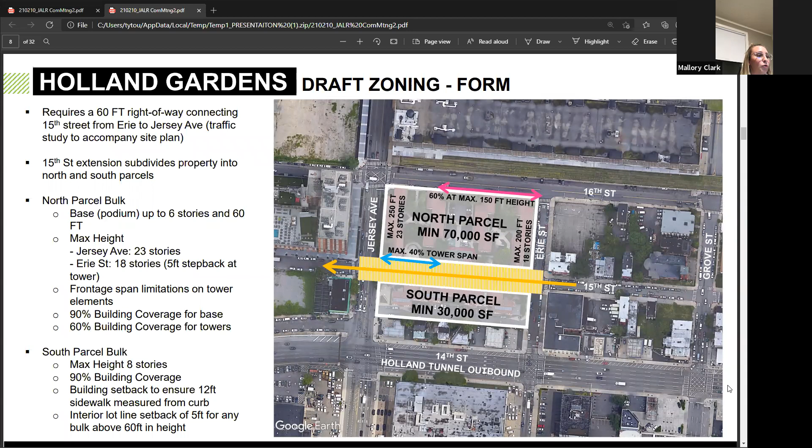This portion, in the current scenario that the Jersey City Housing Authority has pursued, is envisioned right now as for-sale affordable condominium. So that'll be a unique home ownership opportunity at the affordable level, which is not as common an affordable housing prototype as we see here in the city. This will be a lower rise element up to 8 stories, and it's still to be determined if it plays out to actually be for sale, but that is the scenario they're currently exploring.

And then what does this mean in terms of function? We've gone over the form and how tall things might be, but there's a lot of other sides of this property that the community is concerned about. So there are things we're writing into the plan. Some of these are handled and enforced by the Jersey City Housing Authority, but there's the ability to address some of these things in the zoning itself, and that's where we step in.

So per the development of this property and the bonus to develop it in this way, there will be a minimum of 1-to-1 replacement of existing public housing or income-restricted units on the northern parcel, comprising no less than 20% of total units in the total development. So the northern and southern parcel combined, the 1-to-1 replacement must be at least 20% of that total.

What that really does is, although this property is currently 100% affordable housing, market rate will be introduced on top of the existing affordable housing units in the future, and this makes sure that future development also aligns to the IZO with the 20% requirement.

This also allows us to permit adjustment of the income-restricted unit mix, meaning if there's 5 four-bedrooms, 3 two-bedrooms, and 1 three-bedroom, the new version of this property doesn't have to identically recreate that mix, but it does have to match the total bedrooms.

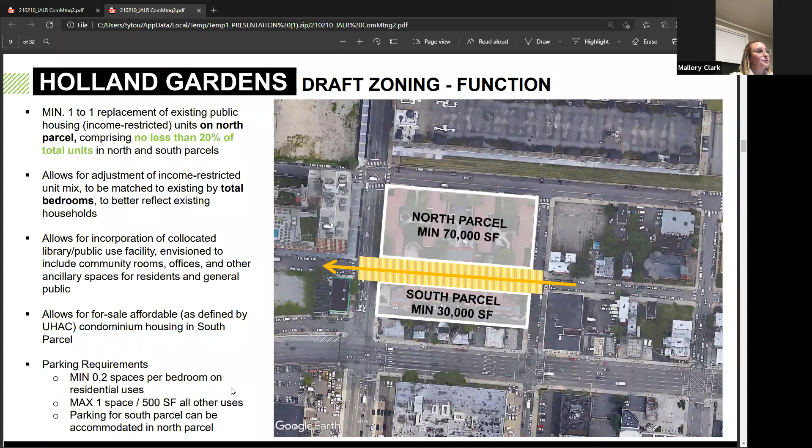Moving on to the other site we discussed last time, where we've developed the light rail bonus a little further and what that means from a form standpoint as well.

So that sets back and allows again for access to hopefully a future light rail station from the Jersey Ave sidewalk. And then we have a 5-foot setback from lots 8 and 10, which are the gas station that exists on that block, and then that grass area. It's 2 lots there, and so there's a 5-foot setback required.

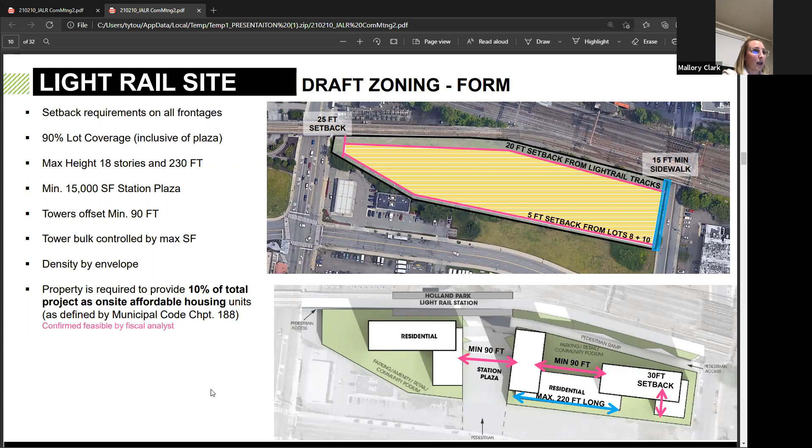I think that basically sums up where we're at with the language. Just to clarify, we will be sharing the draft language, so the actual redevelopment plan that we're looking to move forward, and we're studying a little further. We will be sharing that document on the data portal as well, so you'll be able to see all these details. We just wanted to go over the high level and give you a visual sense of what that language means.

So that's language specific in the redevelopment plan to some of these site specific bonuses. And now we'll get into just this general bonus language.

But first, I just want to quickly end the poll. Thank you for participating, and I can just quickly show you all the results. Is that visible? Yes, okay wonderful. All right, oh okay, other. We got more others for how did you hear about this meeting? Okay, so I am curious as to how you're hearing about it. Maybe if you could throw in the Q&A where else you were getting that information, that might be helpful. I don't want to spend too much time on it in terms of conversation, just because we want to hear some other information from you.

And then I think it's kind of a similar breakdown to last time in terms of where people, why people were interested in this area. So we've got about 17% of you who live in this area, and then 21% who live in an adjacent area.

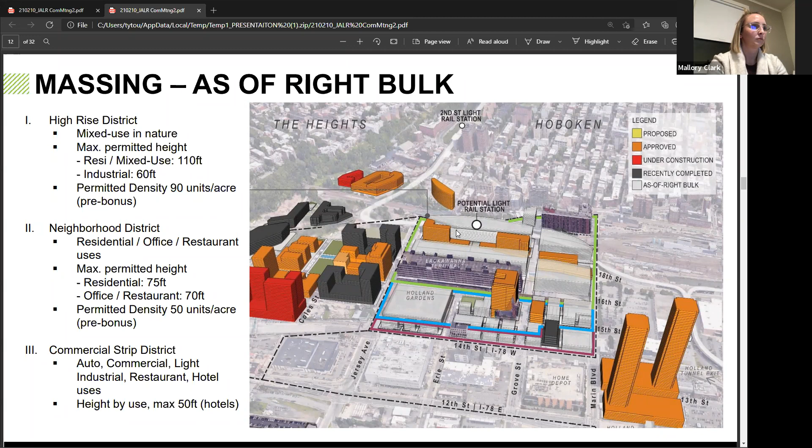So from there, one thing that we talked about at the last meeting was adjusting the open space bonus that currently is written into the plan. So currently we're looking to modify the contribution amount of the existing bonus. There's currently an existing bonus within the plan that would give an additional 30 dwelling units per acre, so taking it from 50 to 80 dwelling units per acre, or 90 to 120. So this additional density would fit into the permitted bulk. So there would be no reason for additional height as a result of this bonus.

But basically we're looking to pick up and modify the contribution amount, which was currently set at $5,500 per unit, which at the last meeting we expressed as a very low number. And then we're looking now to match that contribution to the IZO payment in lieu contribution. So for this area, that's $75,000. So what used to be a contribution of $5,500, we are proposing a $75,000 contribution.

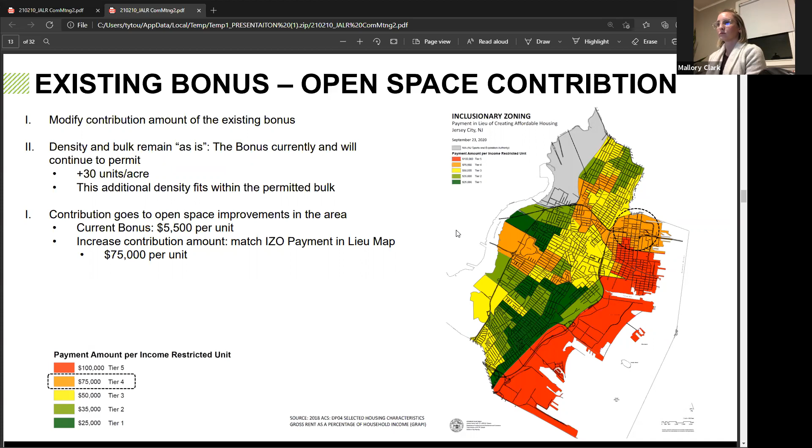And then within this rewrite effort, we're incorporating an affordable housing bonus. The affordable housing bonus would not apply to the commercial strip district, as we'd keep those uses as they are. We feel that they make sense in their geography, and their proximity to 14th Street.

So this bonus would apply basically everywhere else in the plan area where there isn't existing Holland Gardens, which has particular language we talked about, and the light rail site that has particular language and zoning we talked about. So pretty much everywhere else in the plan area, this could be utilized.

So the bonus would require 20% affordable on site. The density is not regulated by dwelling units per acre or FAR. Similarly, as we described for the light rail site, it's regulated by a building envelope. So we've set area, yard, and bulk regulations.

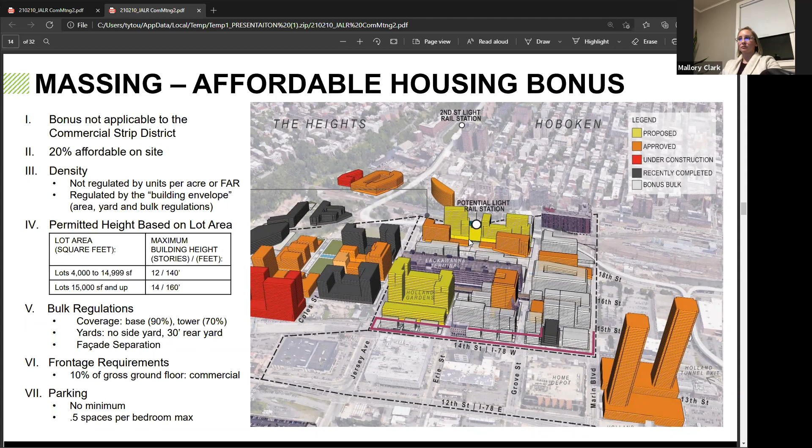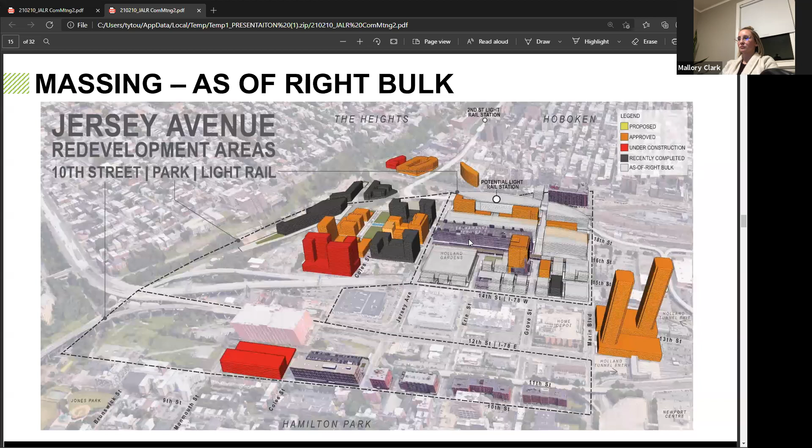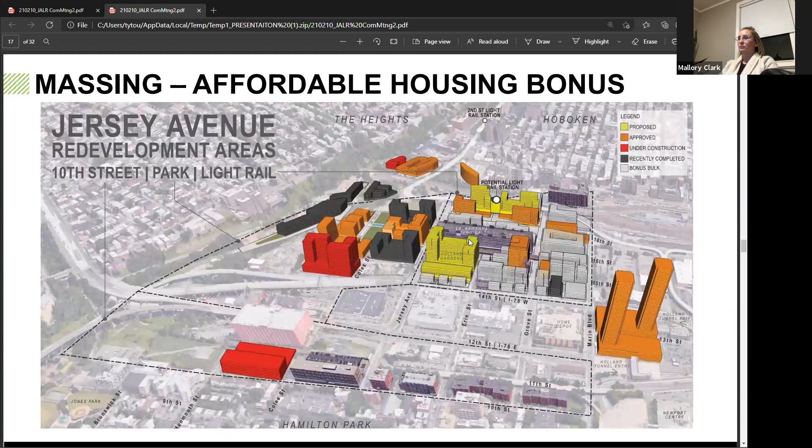I'm just going to flip through these really quickly to give you a look at all of these things put together. So this is the as-of-right bulk. This is with some of the proposals coming in, so it's the as-of-right bulk with the Holland Gardens and the light rail site. And then this is with the adjusted bulk of the affordable housing bonus.

Okay, so on to the next section: community benefits. I won't go over this again, but we heard from you last time that affordability, traffic, and the light rail station are important to you.

So from there, the city has been working to develop this tool called the Triple Bottom Line tool. What it does is it assesses projects and gives them a score of what's acceptable. It's basically a way to see if we think a project makes sense, or if this tool thinks a project makes sense to pursue—is it good for the community?

So your feedback on your priorities and concerns is an input into the internal evaluation process. We can utilize certain weighting criteria that we can modify. So if we know that affordability is a big concern, we can weigh that higher in your scoring.

And we're looking to set this for particular areas within the city, because priorities in one part of the city might not make sense somewhere else. So we're looking to customize this for each neighborhood, as best as we can over time.

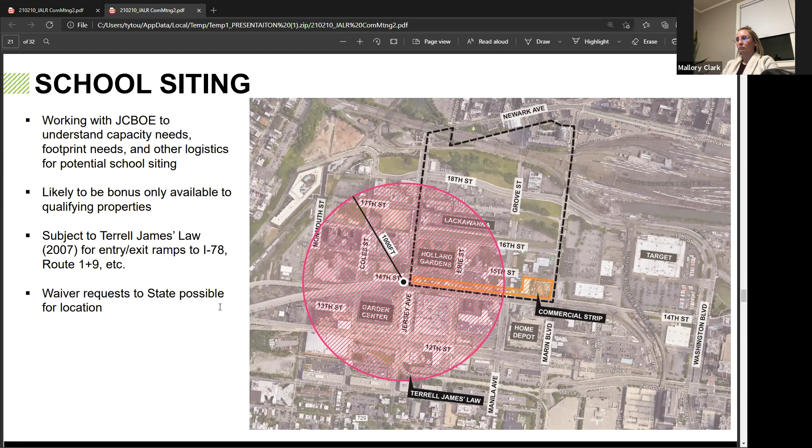And then just to walk you through some references of things that have recently happened, recently gone through or been adopted: locating schools with development. There's Laurel Saddlewood, a full block development, 45,000 square foot school serving 300 to 350 students, pre-K through 5. And resulting from there, it's quite a substantial number of units, 810 units, 50 stories, 5% of which is affordable.

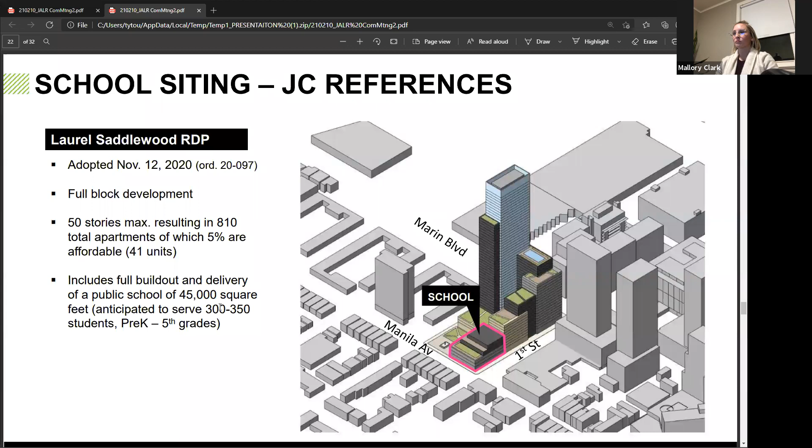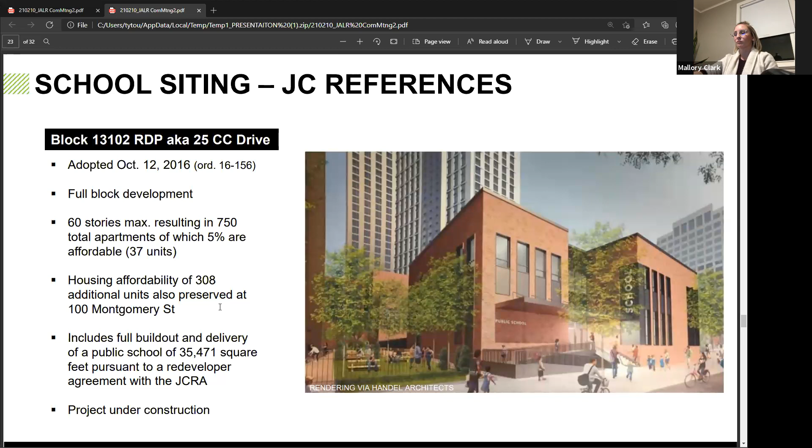Another school location, also in tandem with development, is 25 Columbus. Similarly, full block development, 60 stories, 750 units, 5% affordable, and then full build out and delivery of a public school. That was pursuant to a redeveloper agreement with the JCRA, and it's under construction.

Okay, so I'm going to open up the poll. Mallory, maybe you want to talk over the questions while I open up the poll. Yeah, we're still studying the physical constraints of putting a school in this neighborhood, but we're not strangers to the fact that there's been a lot of conversation about the need for a school in this area, and concerns about the current conditions of students having to cross the Holland Tunnel lanes to get to the current schools they attend.

So the first question we'd like to understand from the people here today: do you have school-age children in your household? That's a simple one, but the next question is, would you support a bulk or density bonus option to facilitate the construction of a new public school in the neighborhood? Understanding there are trade-offs when we talk about bonuses and community development - Liz just went through two examples of what those trade-offs can be, almost always height and density. So are you okay with a larger building coming if that development provides a local school in the neighborhood? This helps us take the temperature of the community and understand if this is the right bonus and how to incorporate this in the plan moving forward.

Thanks. All right, I'll leave this open just a little bit longer. Looks like we have about 60% of the vote in. We could wait a moment, or continue and come back to it. What do you think, Mallory? It's looking on my screen like it's starting to level out a little, I don't see a ton of fluctuation, so we can probably just review it from here. Okay.

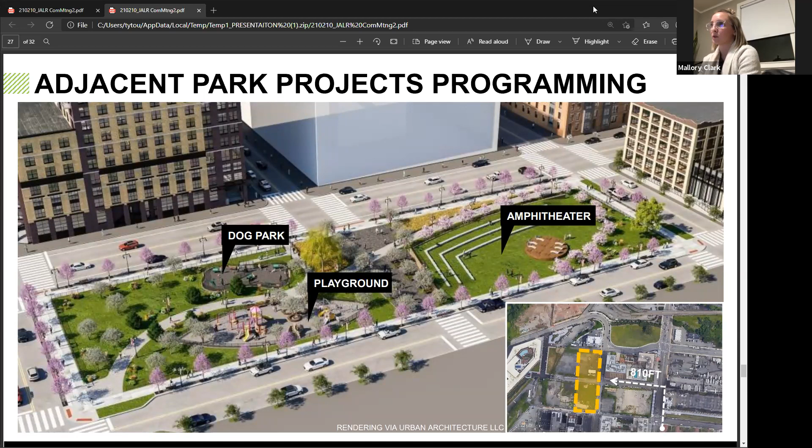And now let's get into meeting the needs of the neighborhood. So like I said, we took our first step of what does the city need, our next step of what's coming to your neighborhood, and now if we look at all those things, what do we need here?

So just getting to understand this park as it exists: it's a 0.42 acre site, a little less than half an acre, or a little more than 18,000 square feet. It's a corner lot, which is great for a park, especially a smaller one like this—it really maximizes light and air and helps the space feel much more open.

The current program is 2 volleyball courts and 2 basketball courts. They're quite dilapidated—I don't think anybody familiar with the area is naive to that fact—but they are still utilized today. You can see the outline of the lining on the courts in the aerial. The park has 100% impervious coverage, meaning it's all hardscape, with no landscaping outside of some elevated planters, which can create runoff problems during storm conditions. And then, other potential uses.

I want to circle back to our first meeting and the Q&A we had. A couple of attendees brought up concerns about air quality in this area, particularly given proximity to the Holland Tunnel lanes. A more landscaped condition and the opportunity to plant trees can always help improve those things. This isn't a large area, so we're not going to transform the air quality of the entire neighborhood through this site alone, but these things happen incrementally, step by step.

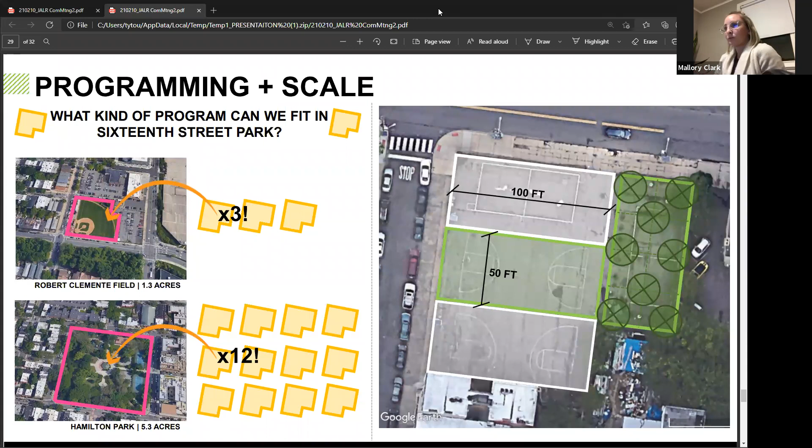And so now we're going to get to feedback. So now that I've gone through the scale of the park and the types of things we can think about accommodating, and how they relate to other amenities in the area, we're going to open up the poll. So we'd really like to understand what your feedback is directly on what you'd like to see the future of this park be.

So I think Liz just opened those up, so they come in, and the first question is going to be, what kind of programming would you like the redesigned park to include? So there's a couple amenities listed here. You can start to fill those in.

And then the second question would be, what balance would you like to see between active and passive recreation? Active being things like sports courts and playgrounds, passive being more open lawn, benches, picnicking - think more low-key, low-energy activities. And then finally, we want to also understand how we prioritize this in the plan, and if the right path forward is for us to consider bonuses in order to incentivize this - both the maximum build out of this park, but also the potential for property owners to donate some of their property and create new parks in the future.

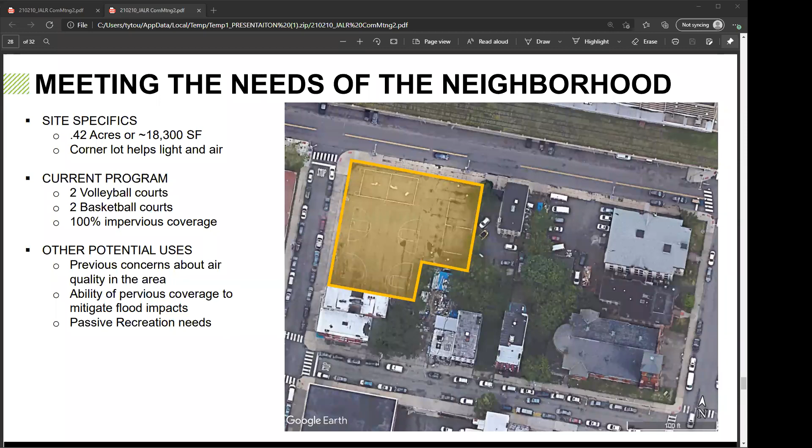Regarding the proposal of the amendment to the plan in this area that I've been seeing on Jersey Digs, if you go back to that slide with the big circle, my business is in that little commercial strip area. So when you see that square box, that's my property there. And I'm disappointed that I am deemed in this commercial strip.

What I see for the future of that property would be a mixed use of commercial and residential, with bottom floors being commercial, adding elements to the community that would be really important, like stores, having this whole little area self-sustained, like a little neighborhood in the new master plan. And I feel like I'm just being left out right there.

So I just wanted to put that into thought, a possible mixed use there, not just commercial, because as I am today, a gas station—who knows in the future where gas stations are going to be standing, with clean energy and everything going forward, which is not a bad idea.

So I just wanted to bring that up, and I really appreciate this opportunity to see all these great things happening in the neighborhood. I would love for my piece to be a part of that, to have cafes and parks in this little area. So that's just my little two cents of saying hello. It's all very interesting and really great and exciting, seeing this area I've known for most of my life go through a lot of changes, all great and exciting.

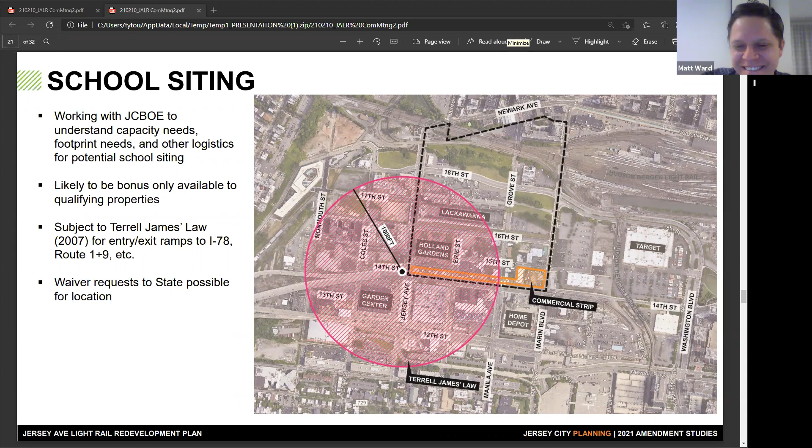I'm trying to get a link right now. Can you read the question, and then maybe we can bring that conversation to live discussion? I was just asking if there was anything from the Q&A you wanted to discuss. I'm going over it all, trying to answer questions—I don't have anything off the top of my head. Okay, that's fine, he's not supposed to be Oz behind the curtain.

Yeah, I do see a lot of people echoing the traffic and connectivity concerns, and I can address those to some extent. So the strategy we're taking in large part aligns with our Circulation Master Plan, which was adopted earlier, around 2012 or 2013. Some of the recommendations coming out of there were asking city planning to decrease auto dependence.

So for a lot of the zoning proposals we spoke about, we're actually introducing maximum parking ratios and having no minimums. We are putting a minimum requirement on the Holland Garden site—that was an outcome and reflection of comments we received from public housing residents who attended the last public meeting.

But by and large, we're looking to drive down the creation of off-street parking, and we believe that will have a large impact on the amount of car ownership in the area, thereby also driving down traffic generated by this area. So it's not necessarily an improvement, but it's trying to mitigate it as much as possible.

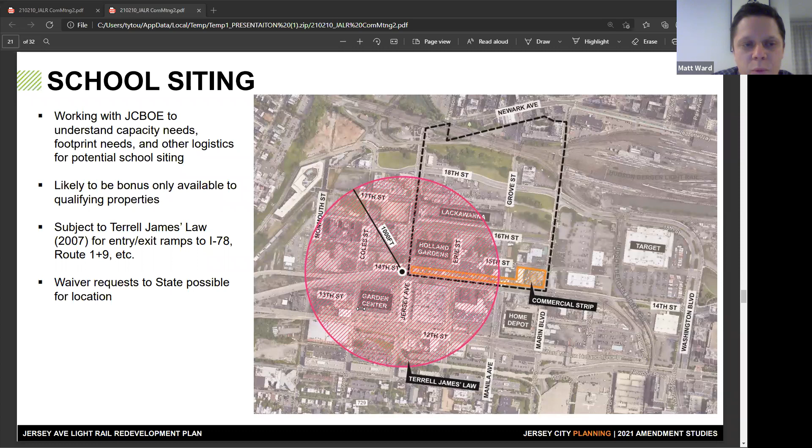In addition to some of the stuff we're talking about with regards to Ern's comments earlier tonight, we're also looking at curb management and loading areas. We all know that deliveries, loading and drop off are a newer phenomenon we're having to deal with regularly. So we're looking at possibly requiring slip lanes in some areas, or indents to the curb, but not decreasing the sidewalk width. We're studying that further right now.

That would be effective to drive down any delay for loading and slow down the flow of traffic. But we also have to keep in mind how that relates to the bike infrastructure we're trying to bring into this area, or expand, because we already have a good deal of protected bike lanes on 18th Street.

I'm not sure if I answered everyone's questions, but what we're trying to do is look at these Q&As that are still open and answer them. We're going to be posting answers to unanswered questions on the data portal, where we're keeping all this information in one place - meeting links, registration links, anything we're pushing out. What we're trying to do by this Friday is push out a working draft of the language we discussed here in the presentation. We'll also be posting the presentation on that same data portal.

Okay, yeah, I see a couple more hands. I just wanted to address real quick, looking at the Q&A - there's some additional questions about traffic assessments and shuttle services to light rail stations and such.

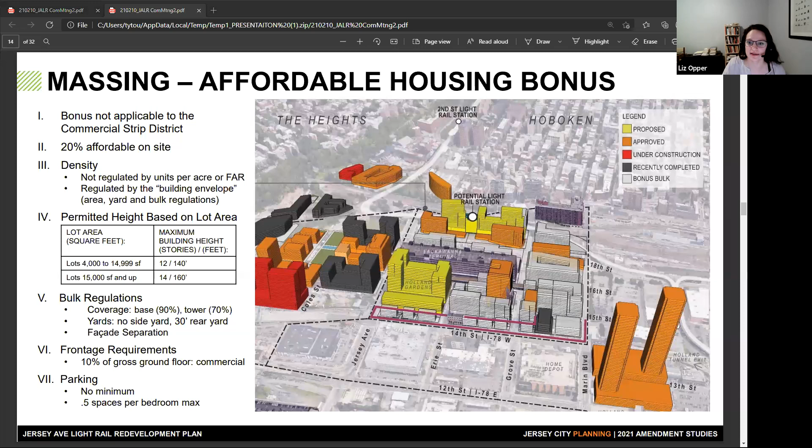Okay, so Frederick. Hey there, hi. My name is Frederick Cook, I'm an architect, I'm actually over in Journal Square.

My question is more about the buildings themselves. One of the things as an architect I hear from my clients almost entirely is that they want 1 and 2 bedroom units only and are not interested in larger unit sizes. I have a concern when developing a neighborhood that this encourages a high level of transition rather than people settling in and raising families. So I wonder, why are you building a school if you're not going to require family-sized units? Is there anything within the zoning strategy where you can encourage people to make units targeted to family sizes, 2 and 3 kids, as opposed to these tiny 1 and 2 bedroom units?

So I'll answer that question, it's a very good one. In other areas of Jersey City, the zoning does have some requirements for 3 bedroom units, like Journal Square has a requirement. In Canal Crossing there is a requirement. In some other areas there are requirements I'm maybe less familiar with off the top of my head. But in this plan, the current thinking right now is that we are not having requirements on the market rate units with regards to unit mix.

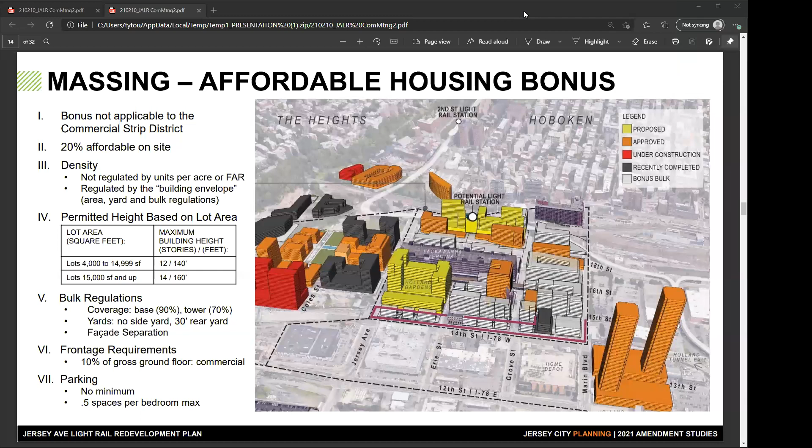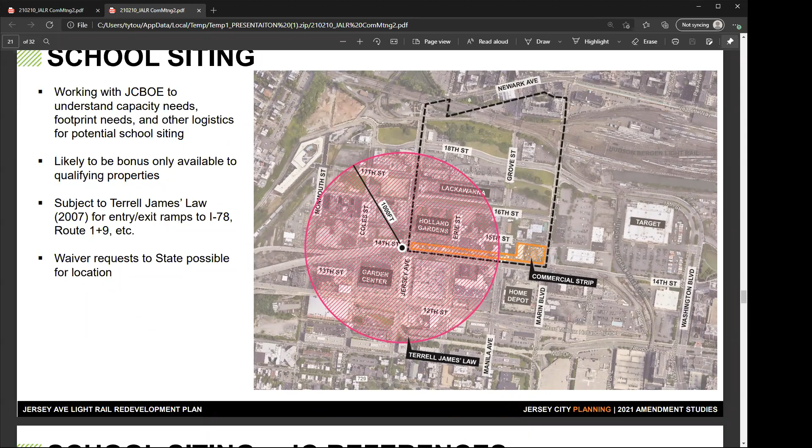Hi, this is my first time, so I'm asking for a little bit of education here. I'm an owner, I live across from where the new light rail station is being proposed. And I saw someone commenting and asking a question about the difference between proposed and approved. So it sounds like that area has been proposed for a light rail, but that's separate from construction, which has yet to be approved? And my understanding is it's been approved to have a station there, but it's been many years. So what really keeps and could potentially continue to stall a station coming in? Because my family would love it if there was something there for sure.

Right. Yeah, so the development itself - in this diagram, everything that's yellow is proposed. So the actual development has not been approved. NJ Transit has - you can kind of see there's a lot of curves of the track geometry here. So this is the part of the track that's straightened out, forever. This is really the place where NJ Transit has planned for the potential for a station to be. The track straightens out here, so it's the logical place for a station.

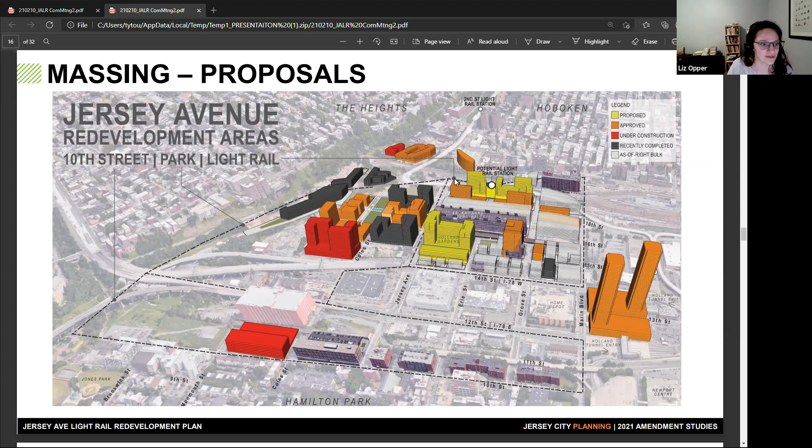However, further conversations and checking in between NJ Transit and the development team, kind of confirming the viability of this station moving forward.

Yeah, so just to elaborate a little bit, the way that we're writing the zoning in place now is that the developer of that site would not be able to get an approval for this bonus bulk and bonus proposal without furnishing proof to us that NJ Transit has signed off on the light rail station. So what that means is they'll have to coordinate with them in advance of submitting their application and getting to planning board. We'll have to have a signed affidavit from NJ Transit that this coordination has occurred and that NJ Transit is on board and finds the proposal feasible.

And then in addition to that, should all of that work out and the developer get an approval and move forward with construction, we're requiring that the station be built out as the first phase of any multi-phase construction. So if they need to construct the property over 2 or 3 phases, the light rail station has to be done under the first phase, and they have to furnish a fully functioning and operable light rail station in order to get their certificate of occupancy - which means in order to move tenants into their building and actually have their building function, they have to deliver the light rail station.

So we kind of have some checks in place along the way to make sure that we're actually getting the benefit. And at a very high level, like Liz said, we do know that NJ Transit has looked at this run for feasibility of a station in the past. They haven't moved those plans forward concretely or fast enough for our preference. And so this is a great way to help accelerate that conversation and help accelerate implementation - to leverage the private sector to really introduce these kinds of things. But it's something we're aware that we need to make sure that if we're writing the bonus in place, the station is 100% delivered and guaranteed for that development to happen.

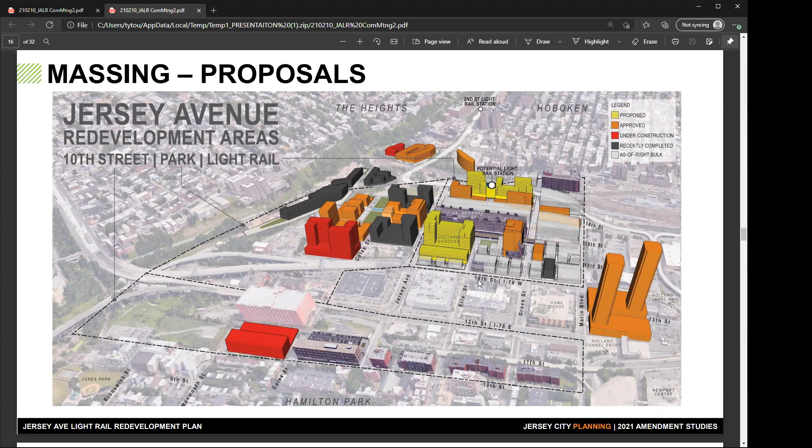Gotcha. All right, yeah, and I'm just curious - I'm kind of learning here. In a perfect world where everything is approved and we're fine and dandy, realistically, how quickly do these things get built?

Construction of something like this would definitely be a multi-year effort. If we're talking short term as the next year or two, and near term as the next 5 to 10 years, I'd say we're more towards the near term side. Right now we're working on the very first step - getting the zoning in place. Then the entire process begins for the developer to come in with a proposal to planning board and get approvals. If that works out, they move forward with actually constructing the project. Constructing, engineering, and designing a light rail station is not a short task.

Thank you. Thank you for that. Yep, yeah, thank you. Okay.